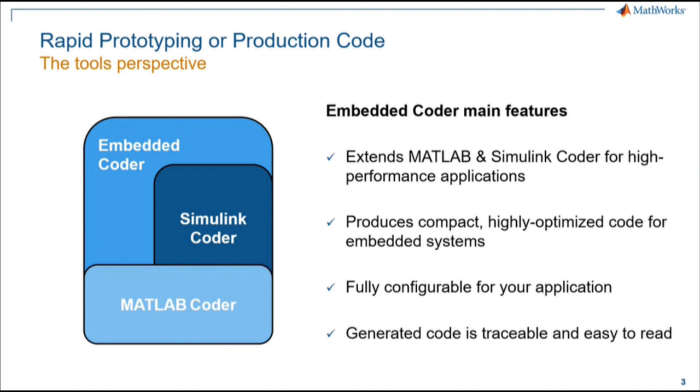But if you really have an embedded system where memory allocation is a concern because of your processor, and you're not running on a Windows environment, or you need your code to follow standards like MISRA, then Embedded Coder is your solution or your choice. Embedded Coder is based on Simulink Coder and MATLAB Coder. So that's it for the licenses. AUTOSAR Coder is based on Embedded Coder, so you will need one and another for running AUTOSAR with Simulink. Nothing too complicated here.

AUTOSAR has been running for many years, as some of you already know. It's an open and standardized architecture used in automotive. Here are just a few success stories of some of our customers using our tools within an AUTOSAR environment to develop applications.

Here is Fiat Chrysler developing a model-based design application using AUTOSAR to author and develop their model. We have BMW, who also did software development using model-based software with AUTOSAR. I'm not going through each one by one. Those are other examples, and at the end of the presentation we can provide the slides. Those are hyperlinks, and if you're interested you can read the various articles to see how they implemented the tools for the application.

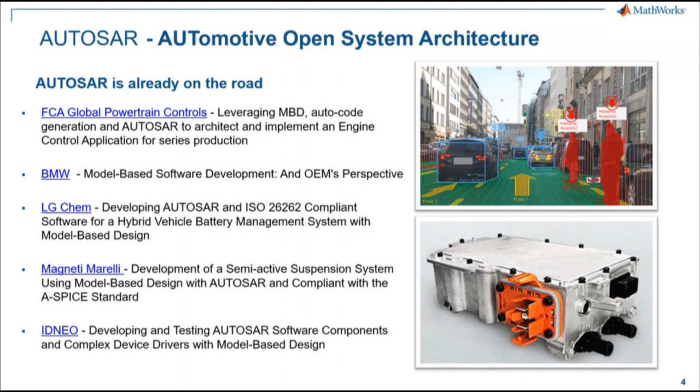So now we're going to start diving a bit more into the subject. AUTOSAR is a standard used in automotive, which stands for Automotive Open System Architecture. So we understand that is something we are going to use at the architecture level. I've seen in the chat that quite a few of you used terms like SWE.3, SWE.4, and so on.

That's an ASPICE term, so we will be, of course, around the SWE.2 architecture level. Just a bit of history: AUTOSAR was founded in 2003 by some core companies, mainly in Germany. I think PSA, Peugeot, Citroën were on top of it, not sure about Ford, but some companies around the world, plus a big core of German manufacturers. It was introduced to provide a standard for applications to talk to each other, something standardized as systems started to become more and more complex with more controllers within a vehicle.

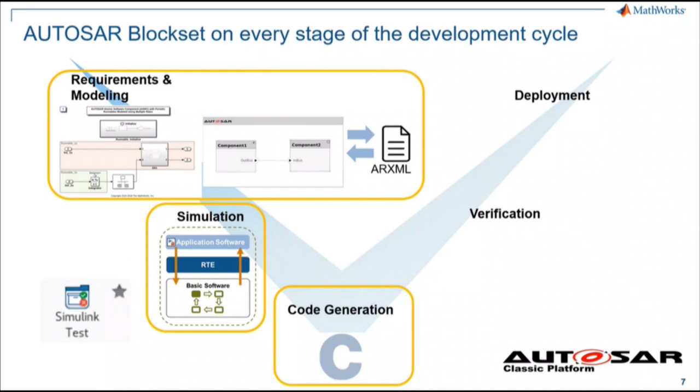We're talking about an XML file which you can import and export within your models. As all model-based design users are aware, you can simulate your model very early, running some tests even as a developer to make sure whatever you're developing is behaving as expected before formal testing. You can generate code from your model, and then run the official testing phase. We've got several tools for that: SIL/PIL Manager, Simulink Test.

And then, as mentioned, you can import an XML, start with your whole development, generate code, test, and then export an XML again, which includes some of the changes you may have brought during your development, and integrate that in another tool at a higher level into your development process.

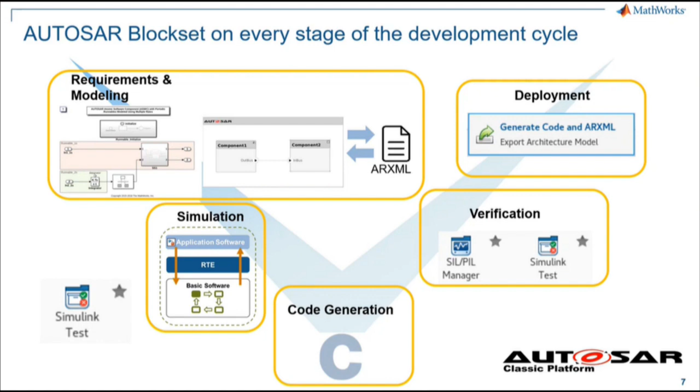So we are now going to just briefly talk about the adaptive support in Simulink, just to show you that we are supporting both standards.

So, as I mentioned, why are we having a new platform? We can see in this image, for instance, if we are developing an application for autonomous driving, you need to be completely aware of your whole environment - these are extremely safety critical. You'll have cameras, sensors, radar to map your whole environment, and all of that needs to go through your whole architecture to be processed quickly, in order to react timely and ensure complete safety of the user.

The vehicle will also be completely connected with its environment. Again, we're talking about a huge amount of data, and being connected to the outside world, which is not possible with Classic. It is something which is in the car with a standard bus and is not aware of what's happening around it, nor has any interest in being connected to what's happening around it.

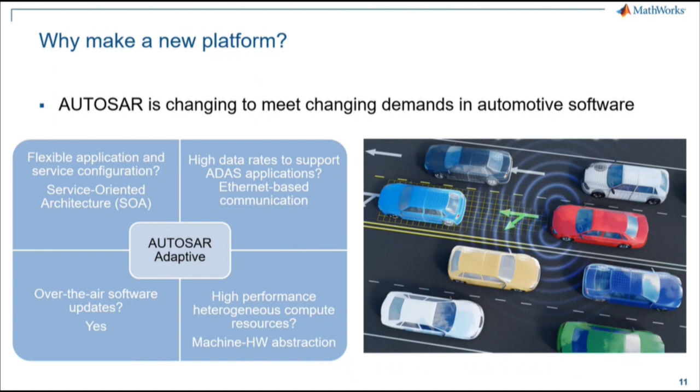Service-oriented architecture, adaptive AUTOSAR is C++ based, which means that when you have a classic AUTOSAR platform, you do have a software, you have your layer of architecture, which is talking to another application. Think about, and that will be one ECU talking to another ECU. In adaptive software, it's service-based.

Think about some independent little software which are talking to each other, sometimes within the same ECU, providing or requiring services, or sometimes doing both within the same ECU or some other ECU, each one fairly independent. Maybe a clumsy analogy would be the applications in your phone, which can sometimes retrieve data from each other. If you're into sport, you may use Strava, and then you have your mobile phone health application, which is retrieving data from there, and vice versa, within your own environment, which is your mobile phone, which is also talking to this outside world, regardless of what's happening with your application.

So we have some of the similar image we had seen already, just as a very quick summary about the difference between computing power. This is the instruction, the data instruction process per second, the amount of data which needs to be transferred.

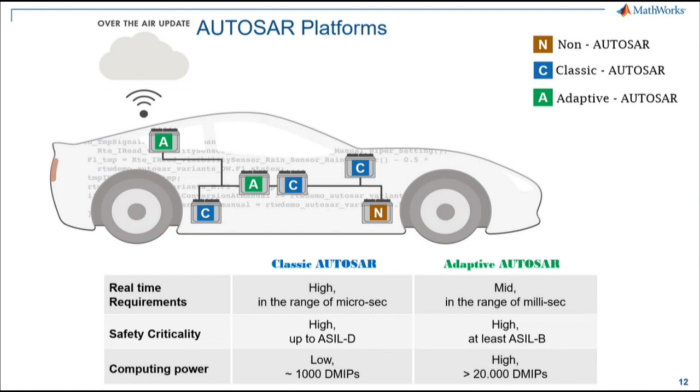We're talking about safety criticality. In classic AUTOSAR, you may use AUTOSAR, but it doesn't mean that everything is ASIL or has to be ASIL D. In adaptive AUTOSAR, it will be at least ASIL B rated. As I say, most of those applications are safety critical. And when you start replacing the user and having to understand the whole environment, you cannot fail. And of course, any failure in that can be quite dramatic.

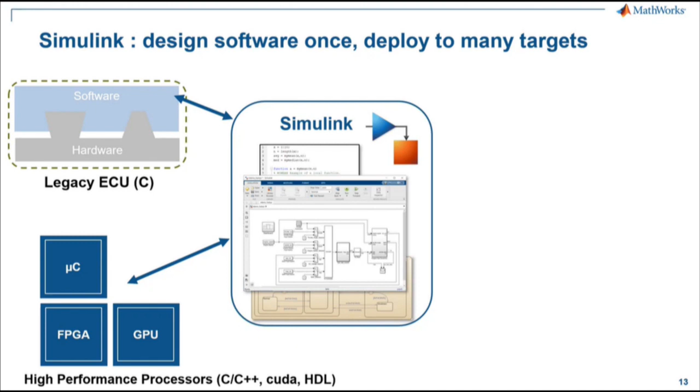And for that, you do have the possibility to use MathWorks tools, Simulink, to develop your whole application, regardless of your ECU. Different coders allow you to generate code in C, C++, HDL code according to your application. The possibility to develop application following AUTOSAR Classic standard or AUTOSAR adaptive, or to follow the adaptive standard.

So for AUTOSAR adaptive, I will just stop here. It's just really because otherwise we will not have enough time. It's just to show you that we are supporting the adaptive standard as well as classic. And something to mention, MathWorks is a key player, an active player in the adaptive standard, which means that we are also actively taking part in the redaction or the writing of those standards, which of course allows us also to integrate that into our tool.

So now we're going to go a little bit deeper into the subject, and now we're going to focus solely on classic AUTOSAR. Checking the time, we have an hour left, so eventually plenty of time.

So MathWorks' approach to mapping Simulink to AUTOSAR. So in here you have an XML file which will be defining your architecture, a very typical file. The way your component will look like into your authoring tool, whether you're using System Composer, SystemDesk from dSPACE, DaVinci from Vector, and the Simulink model or the function model, which eventually would be a representation of what is described in the AUTOSAR, and one to each other can be completely mapped.

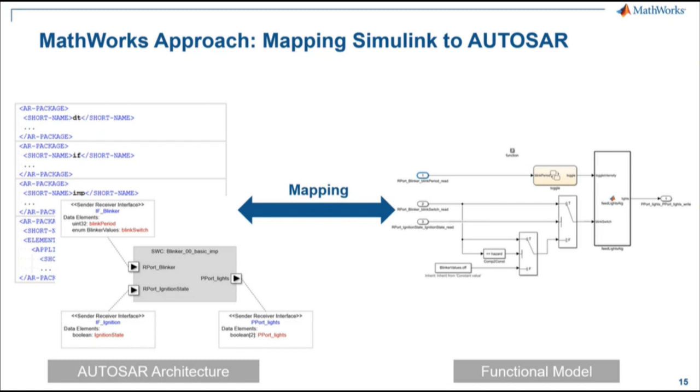So this textual representation in the XML, or what you have represented in your authoring tool, can be completely mapped into Simulink, and of course developed further, modified, improved, or corrected. So in here we would have, for instance, a software component which can be mapped directly to a Simulink model. So the AUTOSAR architecture will mention about 3 runnables with 3 clocks, which we can have an exact representation in Simulink. Within each runnable, so in here will be an AUTOSAR word, and within each runnable, so you have your mapping, you can then inside your runnable include your whole Simulink algorithm.

So some of you are unit developers or testers. So within your runnable, then you can bring all the application or the model you actually developed at unit level.

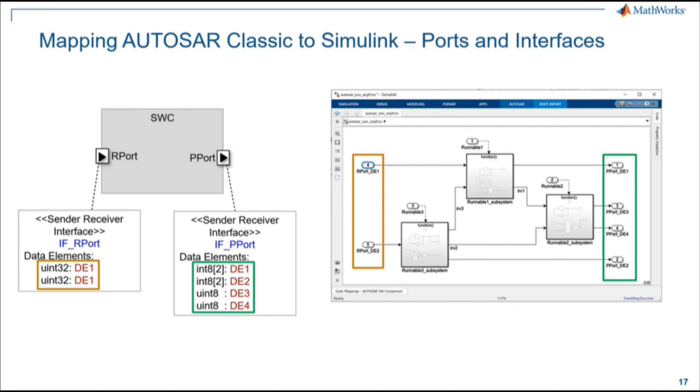Similarly about interfaces and how to map one to another, each port of the Simulink model, the input and the output, can be completely linked to what is described in AUTOSAR. Here we have a port which has 2 elements, so it could be a bus as well, and same thing with the output, which can be completely linked with one and another.

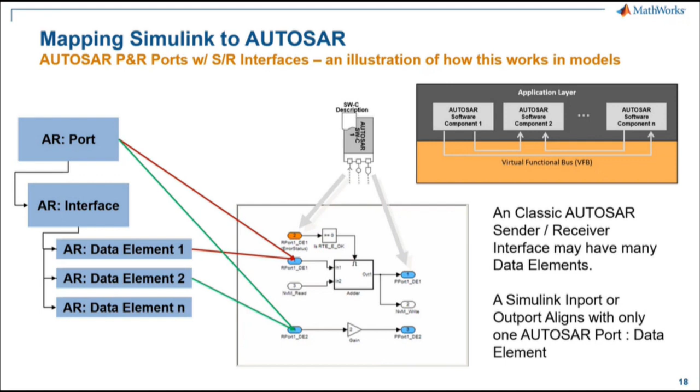Simulink gives you an exact representation of what is described into your XML or in your authoring tool. So talking about all the various possibilities which can be used to model your software and map your interface to Simulink, everything you have or may have used within AUTOSAR, the way you are defining data, array, vector, can be done in Simulink and mapped with AUTOSAR and vice versa. So you have all the modeling capability offered by Simulink within the AUTOSAR world. Whatever complex interface is described or defined in AUTOSAR can be completely imported in Simulink or developed in Simulink and exported to AUTOSAR level.

And we were to finish on the mapping subject. If you have used within Simulink a new development data dictionary, similarly you have within an AUTOSAR model in Simulink an AUTOSAR data dictionary, from which you can define all your interface, your runnable, whether you are your CompuMethod, the configuration of your AUTOSAR environment within the data dictionary. And all the information will then be completely present into the dictionary and can be linked within the model, but everything is centralized into one location.

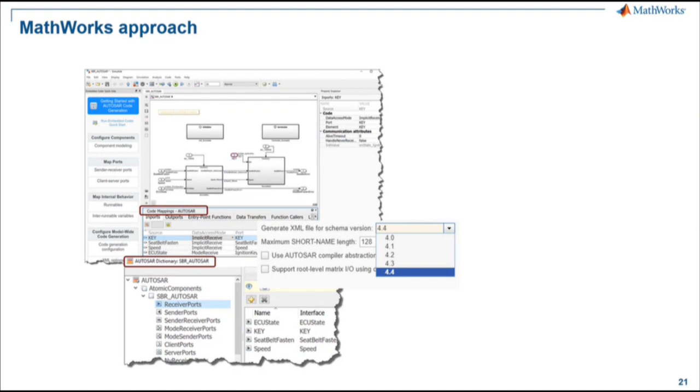This information provided in the AUTOSAR dictionary can be retrieved in the code mapping. If you are aware with the code mapping, that will allow you to set the information from the model code related to this interface. And you can of course choose which AUTOSAR standard you want to use for your code. All of those are inscribed within each other as completely integrated, kind of a closed loop system, if I want to phrase it like that. Once you have applied all those settings, you can then generate or export your code and your XML file.

So let's summarize a little bit what we have talked about. Port - everything which is present in the standard, so sender receiver, client server, port, non-volatile interface - can be modeled in Simulink.

Behavior - we have seen an example when it was function caller, so function call based, rate based. Simulink function can be used within AUTOSAR, and we give you the possibility to use those to model your application. Internal data can be modeled in Simulink - all those information which are defined in AUTOSAR standard. Possibility to use variant according to some platform you may have, so you can define different types of architecture or model according to some control platform. And all of those, as I said, can be modeled in Simulink, from which you can get your code and your XML file.

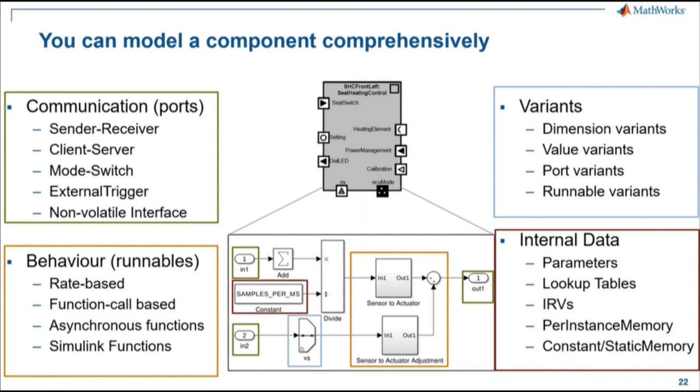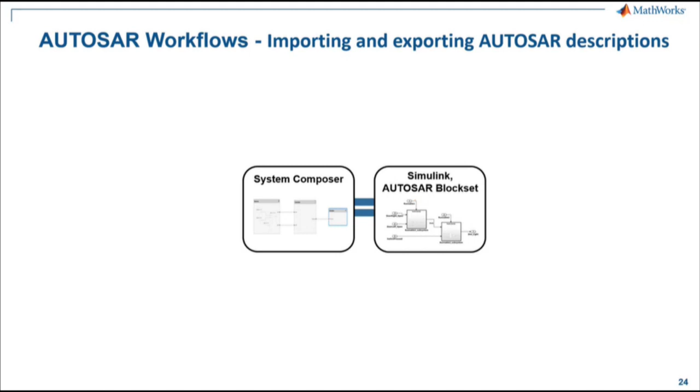So design workflow - talking a little less about the mapping, but just understanding what are the different directions which are supported with our tools. So in here you have an architecture which has been modeled, whether it's in Simulink or in System Composer. What can you do from it?

You can then generate your code from your C file, and you can export an XML. So here you are developing directly your model in Simulink - this is your starting point, if you want. And then you export your generating code, and you get an XML which can be imported at a higher level into your architecture, for instance. And that, of course, is called bottom-up, because the starting point is your model. You're not starting by the architecture level or the authoring tool or the XML.

Now let's assume another company is doing the architecture, or another department, and you have an architecture department which is just providing you all the architecture information. So the authoring tool or the architecture tool will export the XML, which you can then import into Simulink or System Composer. And whatever's described here, you can inherit within your Simulink environment. And as you can guess, that's called top-down, because the starting point is the architecture, and we are going down to the level. So talking about SPICE a bit earlier, we are SWE.2, and we're going to SWE.3.

Let's say we're starting with the authoring tool, we exported in XML, and then we start making changes to your architecture, to your model, modifying the interface, adding a runnable, and now we start having a difference between one and another.

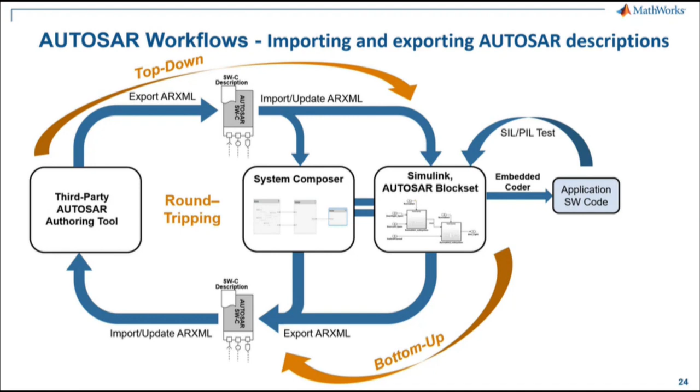Then you can import the XML to Simulink, and then export the XML from Simulink, and that is called round tripping. Once you have done all that, generated your code, exported your XML, everything is closed. You can also run or start the testing phase, whether you want to do a SIL test or a PIL test - software in the loop and processor in the loop, for those not too familiar with the testing jargon.

Now we're going to start doing a little demonstration. Let me just leave the presentation and go to MATLAB.

Let's assume now you are quite new to this, you never used AUTOSAR before. You just have a project which is required to follow the AUTOSAR standard, but you have nevertheless loads of models already developed in Simulink, but not in AUTOSAR - which means you have all those legacy models.

So ideally speaking, what you want is to convert those into AUTOSAR. Here we're having a very small model.

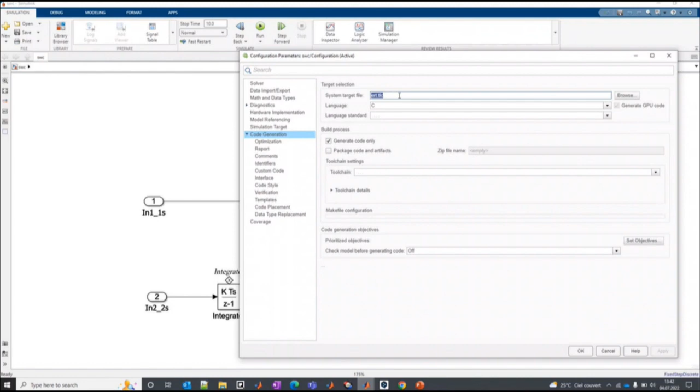And here, if I'm opening the configuration settings - it's Control E for those who like the shortcut - it's embedded code, so the model is set to use Embedded Coder. If I am opening the application, for instance Embedded Coder, then I have the regular code mapping, for those who are familiar with it.

Let me just pin that so the window doesn't disappear. Then you can see it's the same thing as normal. If I'm going to the storage class, they are the standard storage classes you can find in Embedded Coder. But nevertheless, I want this model to be AUTOSAR. So how do I do that?

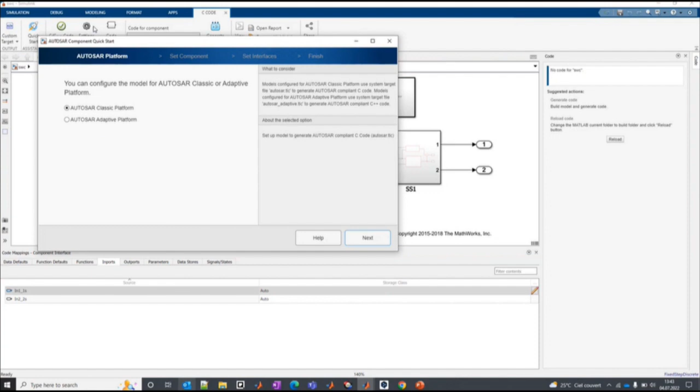If you have a Simulink model which comes out set to a standard coder, and you're opening the AUTOSAR application, you will directly be directed to this AUTOSAR component quick start, which will allow you to convert this model into AUTOSAR.

So we're going to use AUTOSAR Classic for this demonstration. The name of your component, whether you want to change the component type, component package, or whatever - we're going to use the default standard. Press next again.

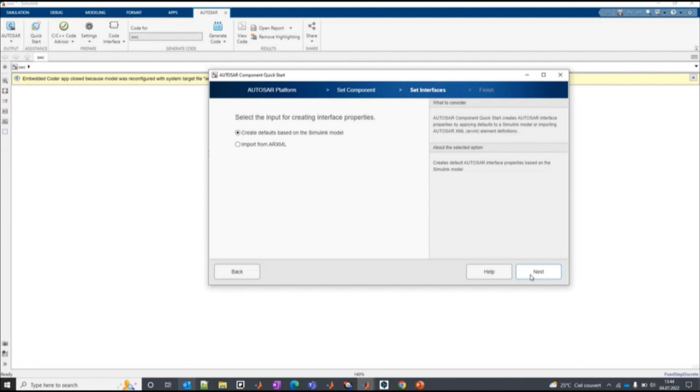Maybe you actually have an XML, and this is what you actually want to do - you don't want to do anything with this model, but you have an XML to import, or you want to create a default setting based on this particular Simulink model. And I am selecting finish, I'm waiting a little bit.

Just to mention, when someone's sharing the screen with Teams or so, it's always a little bit slower. So I'm sorry for the waiting, but it's not a big model - we shouldn't wait too long.

So what do we have now? Not something which seems different. However, we have now the code mapping is different. We have some import - the data, we're not talking about storage class now, we're talking about data access mode, whether it's implicit receive, explicit, and so on. We can see that now we are at AUTOSAR level.

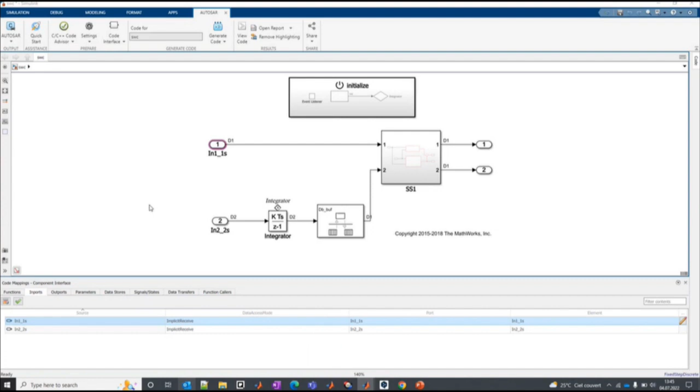And if I'm going to the configuration parameters of my model, we are now in AUTOSAR. We have AUTOSAR options here, which version of AUTOSAR you want to use, and so on - plus, of course, identical or similar code optimization settings which are available with Embedded Coder.

And here on the left-hand side, in the corner, in the code mapping, I can now open my AUTOSAR dictionary - sorry, data dictionary. In which, if I am... let's do it like that.

Now I have the various interfaces here which can be created, the ports of this particular runnable. So here's my import, my output, same thing for the sender port.

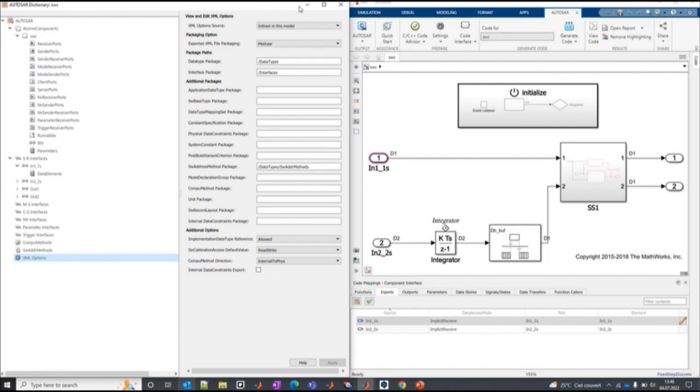All the configuration settings which I was mentioning are now available, and you're ready to start working with this model in AUTOSAR.

And if I was going to generate code from it, Control B, or I can generate code from here, but once again, I like shortcuts. It's working, so it shouldn't be too long.

A little bit of patience. We can open this diagnostic window and see what's happening. So starting building, it will take a bit of time, so I'm sorry for that.

Kind of a funny story - if you guys know Jeopardy, I have the music often on my mind when I'm generating code for any reason.

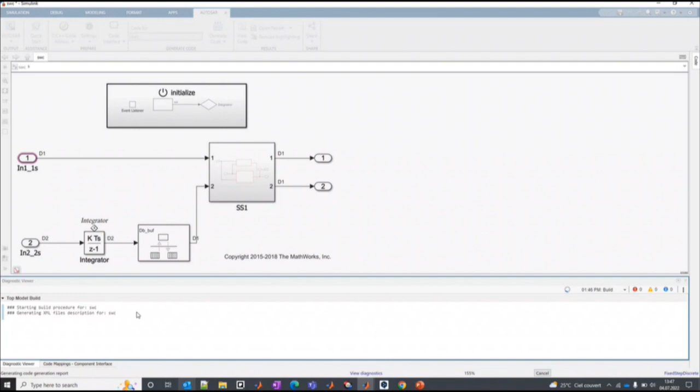So now we're generating the XML file description, technically the XML file. It shouldn't be too long, which means then we could generate standard code before we are now at the AUTOSAR level.

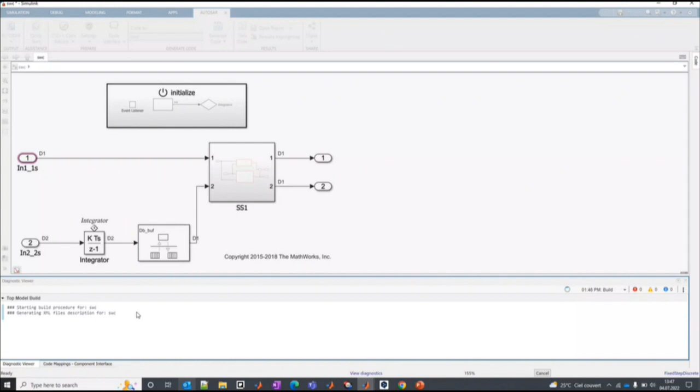And we are going to generate AUTOSAR compliant code as well, so let me close that. So here we have our code.

And we can see the code, starting with the Rte, so runnable, port or interface with Rte.

So now we have generated a complete AUTOSAR compliant code, and you can see the list of files which are generated. We have your Rte type defined here, all the XML of your model here. So with the component, the different ports, all your interfaces are present in an XML, which can then be imported within an authoring tool, as we already mentioned.

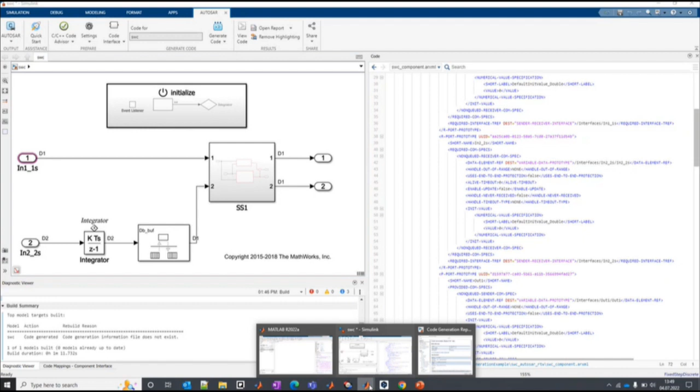So let me just stop that for this demonstration. We have a couple more later. Let me just go back to the presentation.

And sorry, so here, as we mentioned earlier with a different process, we've done a bottom-up approach. So we have a model, and then we're generating the XML and the code - a function call modeling style.

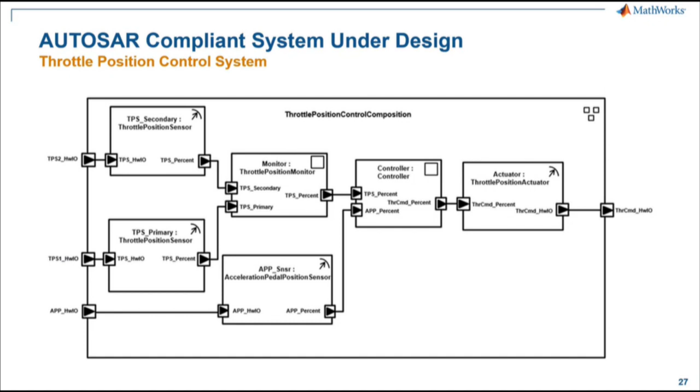So let's assume now we have this AUTOSAR representation, whether you developed it with System Composer or another tool you are using for your architecture. You would like to have this exact representation in Simulink.

So once again, we have that little guy, and what we want is to import. So from this authoring tool, we will have an XML available, and we'd like to import that into Simulink. How do we do that?

It's actually fairly straightforward - we just have these two lines of code. That's the name of the XML which will allow you to import it. So even if you have not used AUTOSAR and you have an XML available, maybe from another vendor or another company working on your architecture department, with this line of code you can import it and you will have this exact representation into Simulink. You can see the layout is similar, the interfaces are identical, and so on.

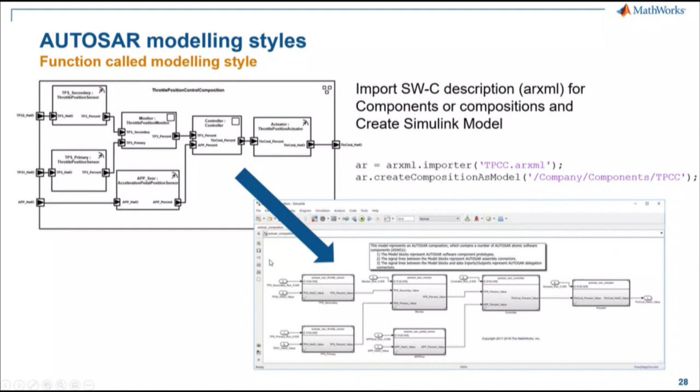Now let's assume the architecture department is giving you an XML file, and then a couple of weeks later they bring some modifications into the architecture. You would like to import this new XML, but that doesn't mean you're going to start from scratch and figure out what they changed. It's actually possible, again with the XML importer in Simulink, to update your architecture from a new XML.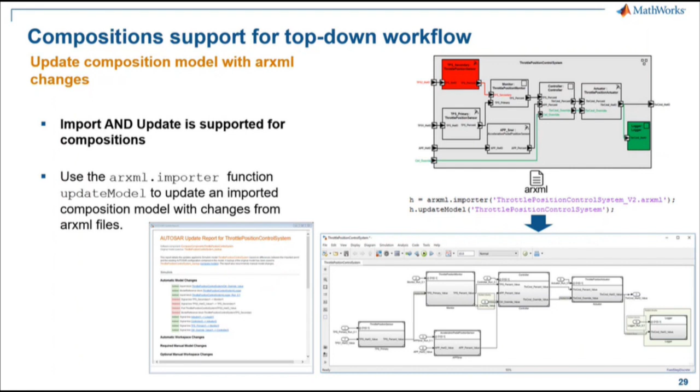Of course, you cannot model what has disappeared, but there is a report which is also generated, which will list all the parts which have been removed. That is an HTML file, it can be changed, it can be opened separately. Then you can see exactly where the changes are without needing to start from scratch - so much easier for model review.

Once again, we're going to go back to a demonstration. If you have any question, just let me know, you can ask. Let me just close the previous application—no, I don't want to save. I'm going to clean that and move to another example, and this one will be function call.

Hello, hello, this is Mustafa. Do you have an example for basic software side that also, I suppose, that you showed to the application side?

Yes, I have. So two things: I'm going to show you, so in a third demonstration, we're going to have basic software module in a demonstration. I have prepared a model which is a simulation of a diagnostic event manager, finding a fault and reacting to that. If I don't have time to show this example, I have nevertheless at the end of the presentation a link specifically with that example where you can simulate an application of basic software and observe how the model is reacting to it.

Thank you. You're welcome. So I have opened a project, and we'll just open this AUTOSAR composition model.

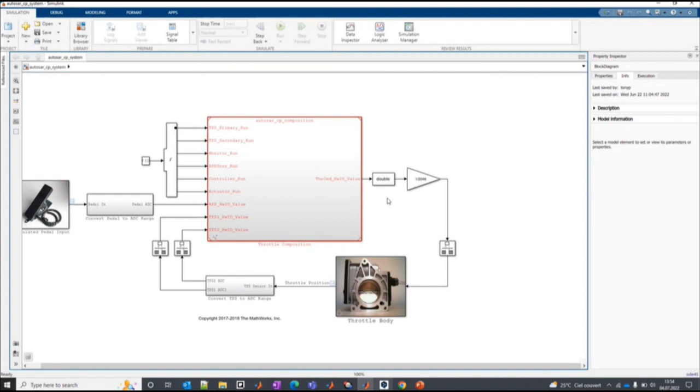As I said, everything takes a bit more time when you are sharing. So nothing too fancy — in here we have some input in order, some feedback in order to validate, control, prove, and check our composition in here.

So I will just start by running a simulation first, and then we're going to dive into it and I'll show you a little bit how it looks. In here we're not in AUTOSAR, it's just a regular embedded coder and stuff like that — it's just for simulation purposes.

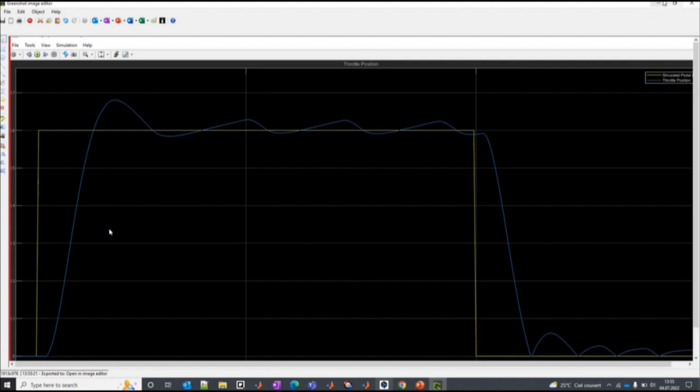The AUTOSAR part is this model reference, which we are going to go into in a second. I have run the simulation and I have that — it's not that important, let me take a screenshot of that because I would like to show you something later. So we save this for later. I can run a simulation and then assess if my model is behaving as expected.

And now I'm going to this composition model. The layout is very similar to what we showed a little bit earlier. Here I have function call model reference, each of them being a runnable, and inside I have my algorithm — nothing too fancy, it's just a lookup table, and each of them will have its own algorithm.

So I'm opening my application, and once again, going back to the function interface, I have my little import, data access mode, and my data dictionary. Here, just to show a bit about the difference from what we saw in the previous example...

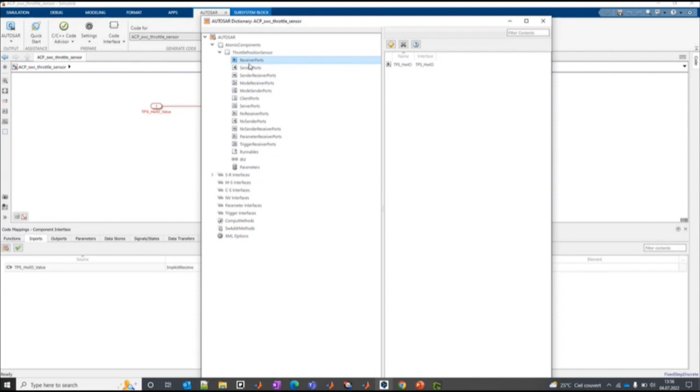We have this throttle position sensor, which is this component, and very similarly we have the interface, this percent, this hardware input interface. But in here we can see many more sender receiver interfaces, and that's all the interfaces present in the composition. Here it's specifically for that component — if I open another component, I'll have all that information here, but the mapping would be specifically presented or shown for that particular component.

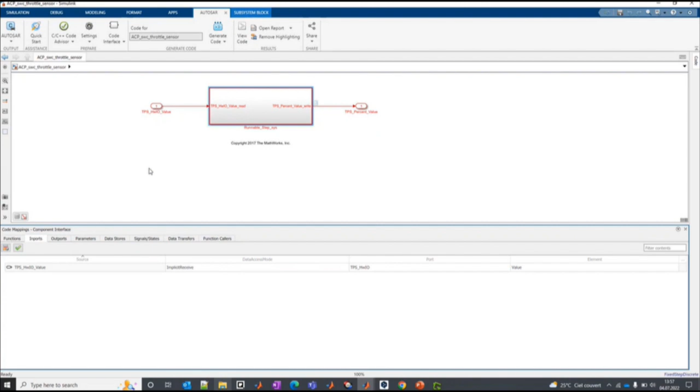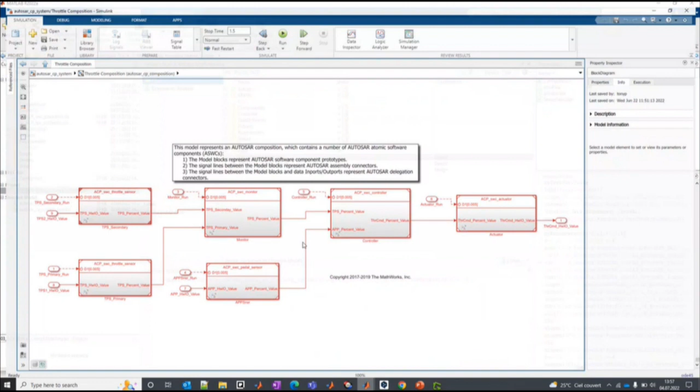So once again, we have something very similar: we have Simulink, we have the AUTOSAR data dictionary, our interface defined here, and so on. But now, let's say we don't have that, and the only thing we have is a blank model reference, and we're starting from scratch. So how do we do that? Let me just close all those, have something a bit clean.

So we mentioned importing an ARXML. I have my ARXML here — let's see if I'm opening the right one. Yeah, so a typical XML when I have everything defined, and that's it. I'm not going into detail, just showing you, okay, this is my XML. I mentioned earlier that with a couple of lines you can just import the XML, so I want to show you, I didn't lie — I only have these two lines: arxml.importer and createCompositionAsModel.

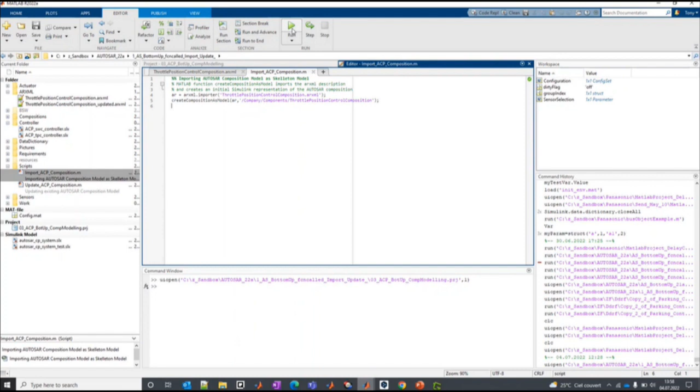The composition is this model where all the runnables are linked or connected with each other. So I'm just going to run this script, and we're going to wait a little bit for the import to be finished.

And now I have this composition. But what's the difference? I have the same runnable. So let me just open the runnable itself.

Similar, I am still in AUTOSAR. I have a component, I have my data dictionary, but if I go inside, I don't have any algorithm, because AUTOSAR at the end is an interface standard. So now I am ready to receive my algorithm.

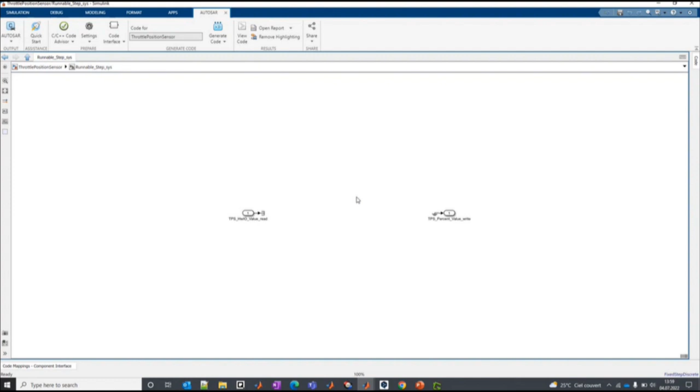As I mentioned a few times, some of you are unit developers, or you are at that level. This is where you're going to start. You get the XML from the architecture guys, you import it, and now you can drop all your algorithm within the AUTOSAR framework.

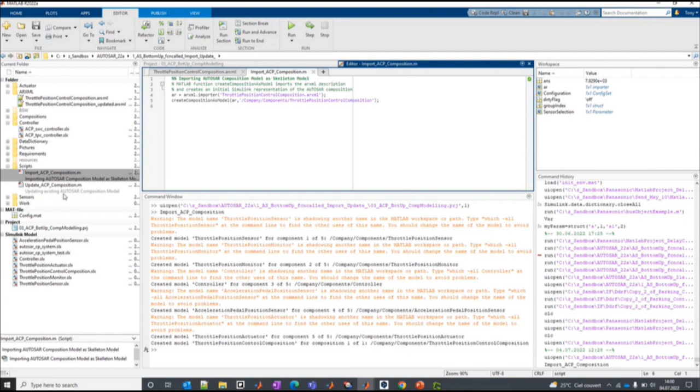Just to show you very quickly, for the demonstration, let me go back to my script. Here, if you want to update, it's also just a couple of lines. So the XML importer is identical. Here we want to create the composition model.

And then the function is a bit different. I want to update the model, which is of course the same name. And I will run that. Okay, it's 2 o'clock.

And now it's going to start opening. Now it's talking about 6 components. So it's updating component 1, component 2, and so on, then saving the model.

And I have a report, as I mentioned earlier, which is pointing to the changes into the model. And as shown in the slide, all my changes are now highlighted in green.

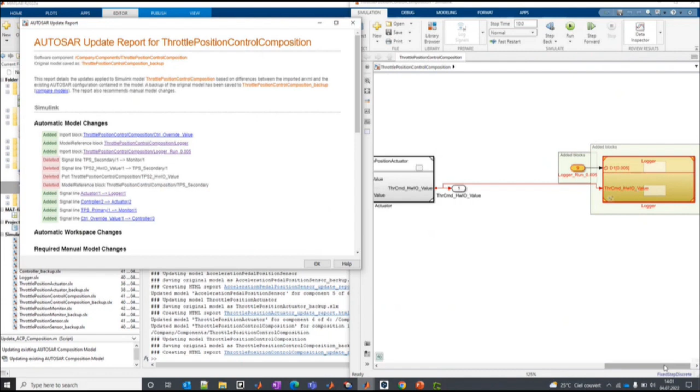From the report, let me just do that, I can select and navigate using the hyperlinks to the exact location of the changes in my architecture. Of course the deleted items are not shown, but they are listed in the report. And it's telling me that this component, TPS secondary, which was here, has now been deleted, as well as all its interfaces.

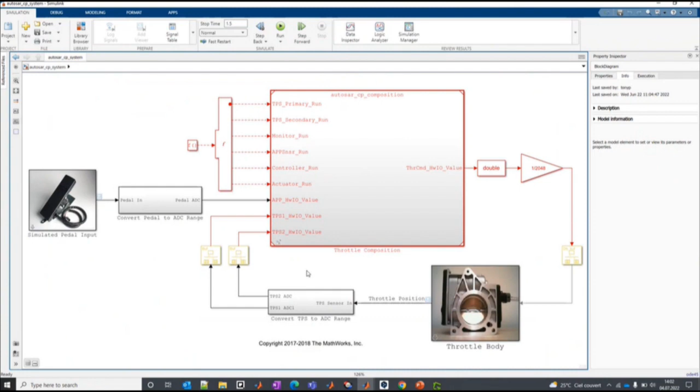And that's it for the demonstration. We can see how quickly we can import or update our XML and start dropping the algorithm or the unit within your composition.

So let me go back to the presentation itself. And oh yeah, something to mention, one of the links I put at the end of the presentation is the release note, because I don't know what version you are using, or what version you're planning to use in the future, but you will see the list of new features or improvements included for every single release.

It could be a presentation on its own to detail each release, but something interesting some customers have asked for quite a bit of time is the possibility to generate an A2L file from an AUTOSAR model, and from 22A it is now possible.

So if any of you, some of you guys are software testers, and I'm not sure if you're doing calibration work as well in the system, you can now export an A2L file. This is where it is located. If you're using Embedded Coder and generating an A2L file, it's very similar - you have the share button on the right hand side of your tab on top.

And that's it, so it's shown as that. Oh, and that's the setting of your calibration. You have different versions for your A2L, whether you want to also generate a CDF file, address replacement, all that is now available.

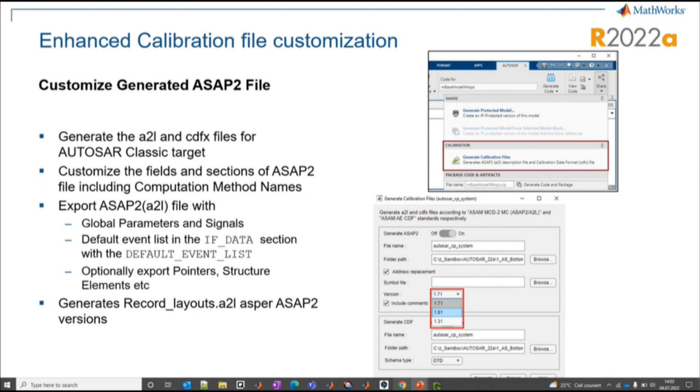Good, System Composer, we mentioned it a couple of times. And if you guys are using an authoring tool, you can now use MathWorks tools to do something similar. So where are we at this level? We are right here.

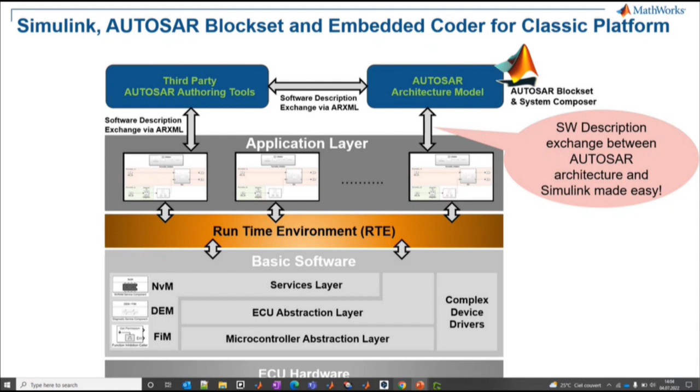So you can now model your entire architecture. You can export XML and import that to Simulink, or as I was going to show you, you can also include your Simulink model within your authoring tool and have everything completely integrated with each other. Not spending too much time on that, it's just a navigation panel for System Composer if you're not familiar with it.

At the end of the presentation, one of the links I've placed is a video, about 10 minutes long, and it shows you how easy it is to actually create an architecture model from scratch with System Composer. It's a bit accelerated, but you'll see the tool is fairly intuitive.

This is how it looks. You can create a composition very similar to what we've seen, but not in Simulink—something developed for system architecture. I don't see the chat now, so I don't know if we have architects today, but this tool is for you. You can import XML, you can define components.

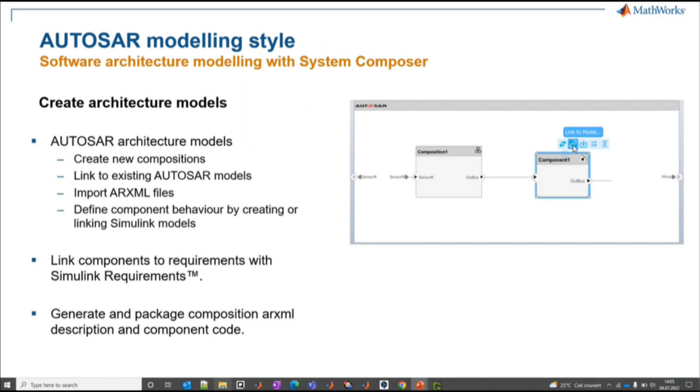Here is really an architecture tool. You're not putting in any algorithm or functionality, you are doing architecture. It's really interface definition. Then you can export—for System Composer you don't generate an XML, they use export—and you can do all that.

Basic software—we're going to talk about that a bit more again, but this is more or less how it looks for this. You can have a basic software module. The capability to simulate the basic software into your Simulink model before the integration was something quite requested or demanded by the customer.

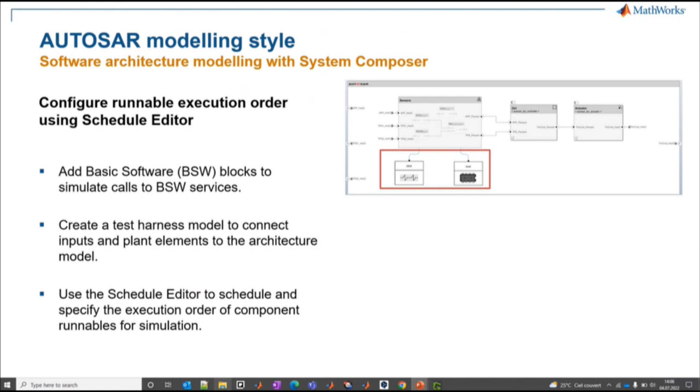You can create this harness model, very similar to what I've shown with Simulink. So you can validate your composition developed in System Composer with input test vectors and visualize the outcome. You can also play with the scheduling of your composition—something optimized for architecture.

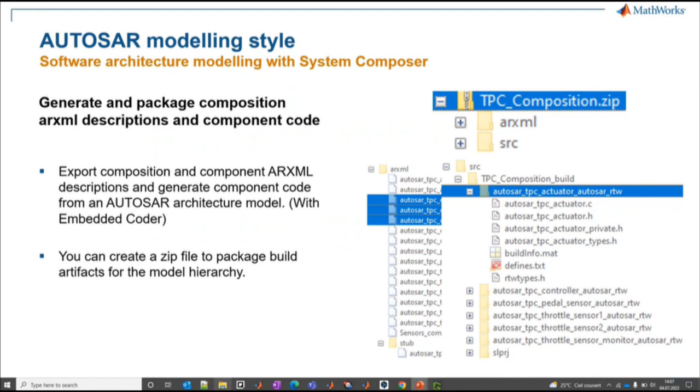And what do you get from it? Exporting a folder which will contain your ARXML files with each of your components, interfaces, data types, and so on, as well as all the C files or code generated from that composition. Now for the demonstration, we need to rush a bit.

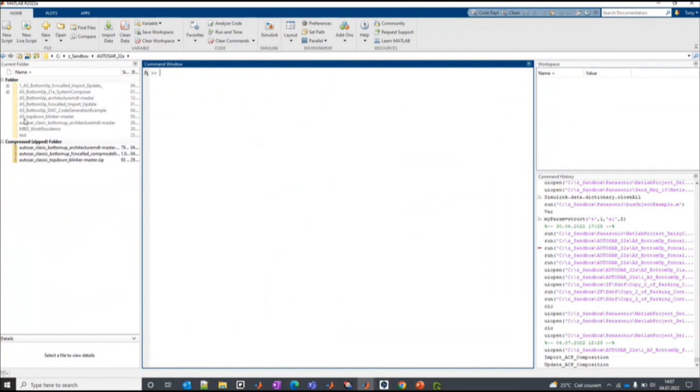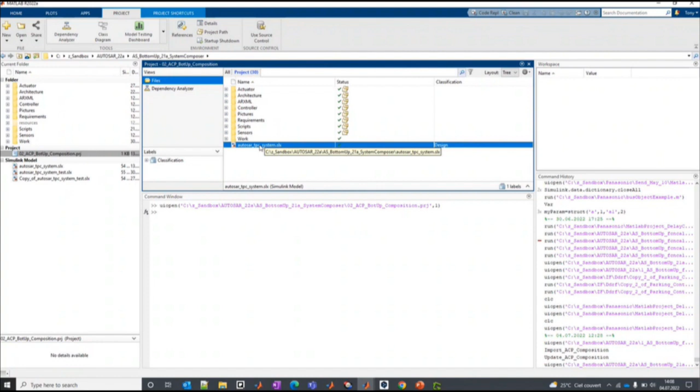AUTOSAR, where is the guy? System Composer. Very similar, I'll open again the Simulink project. I'm not sure if you guys are using Simulink project—you can link all the relevant documents into one framework, script, requirement, and so on.

You might recognize this test harness—we've seen exactly the same—and I wanted to run a simulation again. If you remember, I made a screenshot during the previous simulation, and I'd like to show you something.

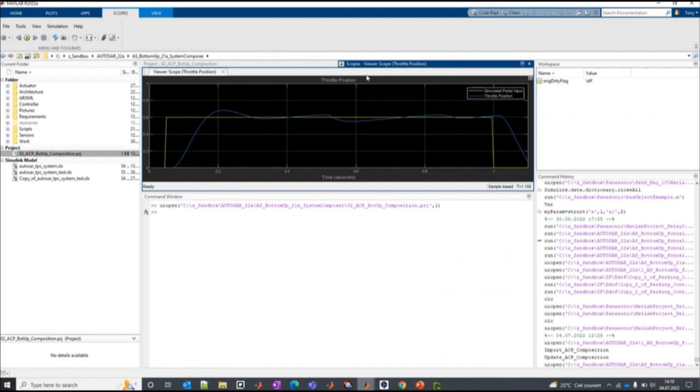So, if I am opening my scope—come on, if you want to open it. Sorry, I'm trying to open the scope. If you'll be kind enough to open, that would be lovely. Unless I have—oh, okay, it was undocked. So that's my scope.

If I go back to the screenshot from earlier, you can see the scale is a bit different—actually, the scale is exactly the same. Let me stretch it a bit. You have exactly the same behavior.

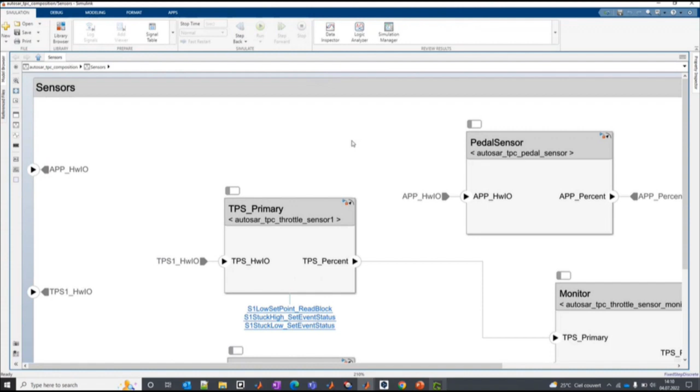What I want to show is that regardless of which tool you are using—we're going in now, I'm opening the model—whether System Composer or Simulink, the behavior is exactly the same. I just wanted to show you it doesn't matter which tools you use, you'll have similar, identical behavior.

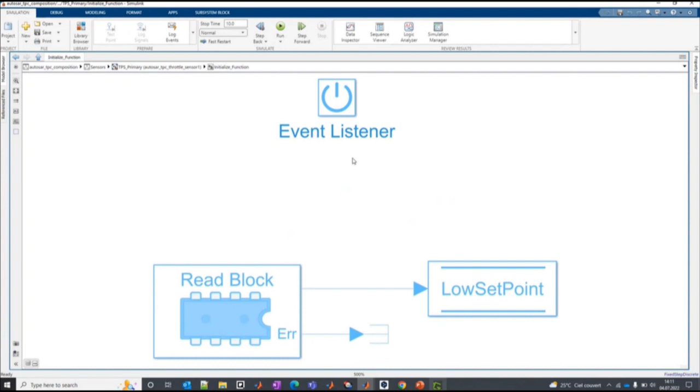For the question about basic software: here, the way it's set up, is my lookup table I showed earlier, but now I have some basic software module recording or detecting any failure or error into my software, according to the behavior of the software linked to the basic software. There's a lot of 'software' in my sentence, I'm sorry.

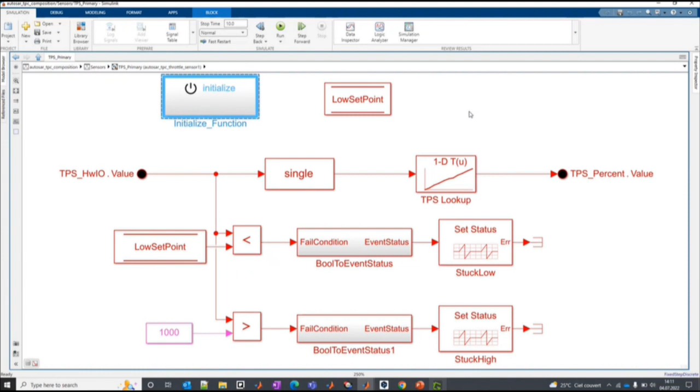So here I have some NVM service caller, with some set points set during initialization. Those are read here. I'm setting some status according to some requirement. Those statuses will all be read here, and according to some condition of those statuses, I'm going to react accordingly.

So for instance, if I am detecting an error in one of those, I will switch from the primary sensor to the secondary sensor because I have detected a failure. And if I have two errors detected, which means my two sensors are faulty, then I will react completely differently.

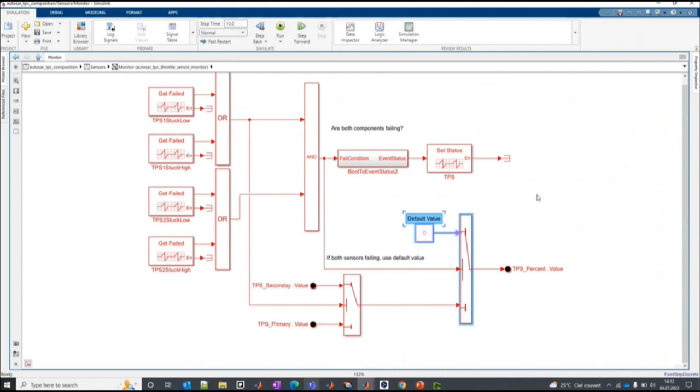So this is the status of my sensor, not TPS sensor 1 and 2, it's status of my sensor, and that will affect directly the whole output of my entire composition, which is at the end this guy. Did I answer the question about the basic software?

There was Mustafa, I think, if I remember the name. Thank you, Tony, no worries. So again, so this is all my... Yes, please, please, Tony, go ahead.

As I saw, the NVM part and also diagnostic event manager side, all that functionality is coming from Simulink side in the AUTOSAR block as a built-in function. It's part of AUTOSAR block set, and here we are in System Composer. But if you select the link I put at the end of the presentation, when you receive it you will see that the example is with Simulink, so those two can be brought together.

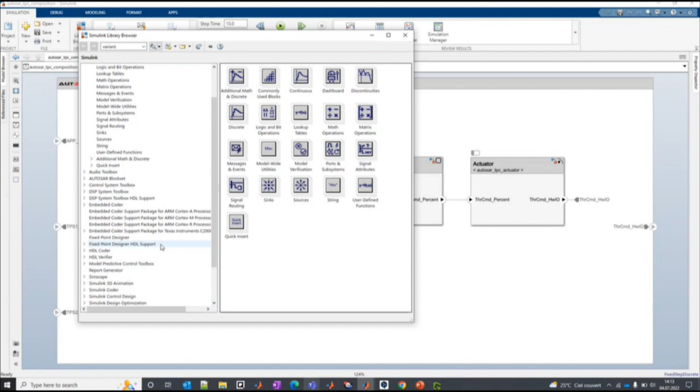Actually, we're going to open quickly the library browser, and you can see there is this AUTOSAR block set in there. If I'm looking for AUTOSAR block set, classic platform, I have the basic software here. So it is part of AUTOSAR block set, and you can use it whether you use System Composer for AUTOSAR or Simulink.

And the example I put at the end is how to simulate and how to use that, which is exactly what I've shown. I was thinking that all that basic software part is coming from AUTOSAR block set, but as far as I saw from your block set, for example, I couldn't see the CAN driver part of basic software and LIN etc. It doesn't mean everything in AUTOSAR standard is implemented currently - some of it, which is defined in AUTOSAR standard, we have implemented some part of it. I'm not telling you that everything which is in AUTOSAR standard is currently available.

It's a work in progress, if you want. So slowly, I'm expecting they will implement more capability, but I will not tell you at the moment everything is possible. Actually, I will show you, for instance, for AUTOSAR Adaptive, we have started implementing some capability, but not everything which is in AUTOSAR is available currently in Simulink.

Okay, thank you Tony, good. So we're running a little bit out of time, so I will stop the presentation here. I just want to show you something very quickly - I will not go into detail. I just want to say that again, if you're starting from scratch and you have a blank model, you can...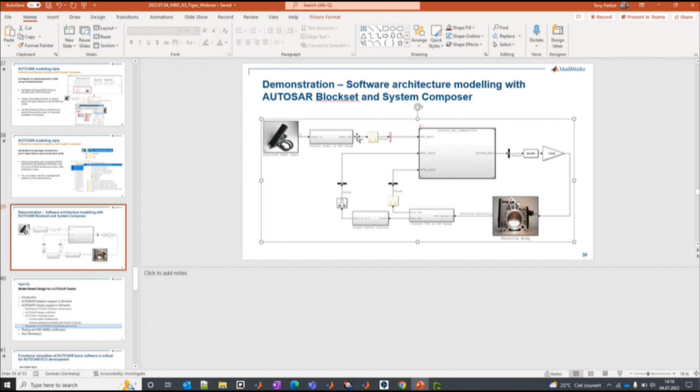In here, import from - so in the modeling tab you can select your ARXML, and then you will be importing your ARXML into System Composer, and you will have something identical to, and you will have these compositions similarly to what we've seen in Simulink. Because of time purposes, I will just skip that. But bear in mind that if you have a blank model, you can import directly the ARXML. It will take a bit of time, so I would like to skip this part if that's okay with you.

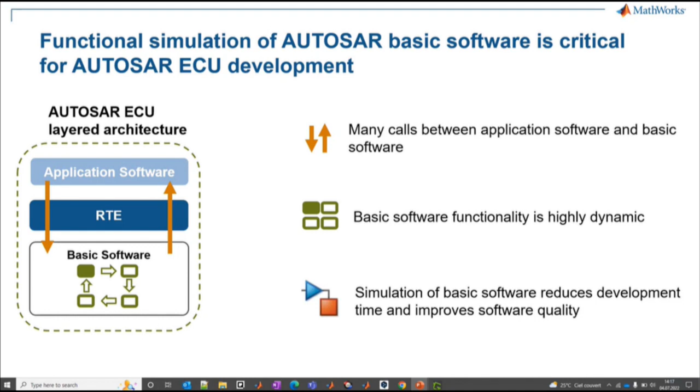So let's continue with the presentation. I might rush a little bit. So we're talking about basic software capability. As you can imagine, for those who are working with it, there are many calls between application software and basic software. Basic software is fairly dynamic. We're talking about the reaction and simulation of basic software, which will increase the confidence you have during development before finding any error during integration. You can also check that your software will react accordingly.

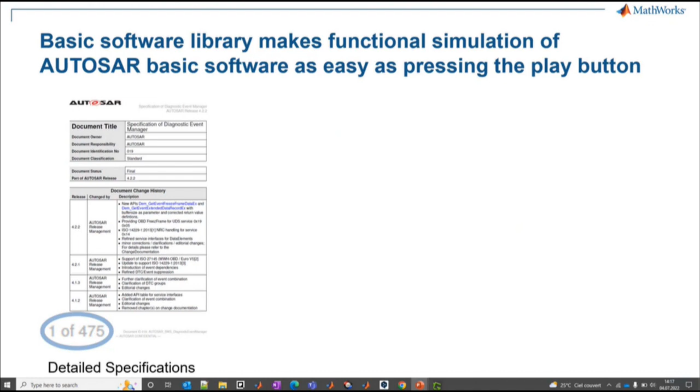We're talking about basic software library. Mustafa, to go back to your question - we have, for instance, this is for diagnostic event manager. The specification is 475 pages, which we included into what I have shown you earlier with some capability to be able to simulate those.

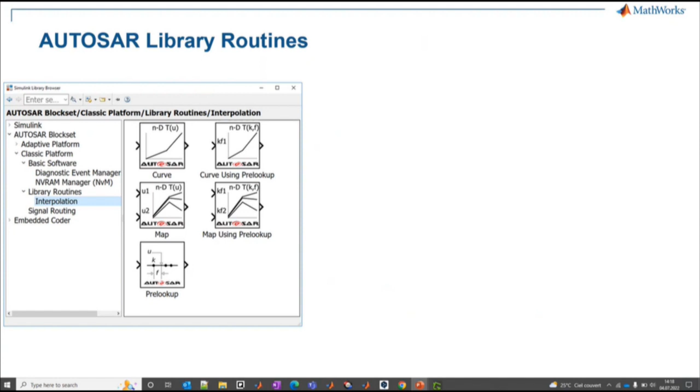Sorry. AUTOSAR library routines - some customers asked to be able to simulate and generate code from these AUTOSAR library routines. Those 5 blocks, for instance, this was an interpolation. If you go to what is in AUTOSAR, you will have many more. I would expect that in the future we will have more routines available in Simulink, but just to give you an idea, those 5 blocks are covering 127 routines defined in the AUTOSAR standard. So eventually it does make your life a little bit easier.

And just to show you an example, this is how your code will look like. And here there will be a very small video. It will be part of the presentation, so you can simulate that later as well, because I have a problem with my bar.

You have some detection about whether for the seatbelt according to some control, and here will be what is observed or recorded for the basic software. So we have something which is detected, speed stuck low. I'm going to click on that. The control is going to increase the speed. And now we can see that past a certain threshold, we have detected a failure in here. The fail status is now going from 0 to 1.

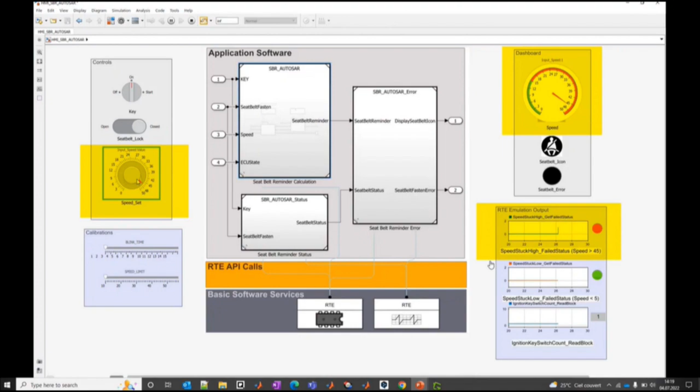So just to show you that you can set an entire simulation and have something nicely set for your visualization with a nice user interface. Testing - we have a few testers in here, so that is your part.

Sorry for the throat. So Polyspace, I don't know if you guys are familiar with Polyspace. We have mainly 2 main products, Polyspace Bug Finder and Polyspace Code Prover, which will allow you to run different checks from one tool to another on your generated code.

Polyspace Bug Finder is the tool which can be used quickly by developers. They're going to check the code - is it MISRA compliant? You're going to have some warnings, you can change your model. You can use that on a day-to-day basis, which ensures that whatever the developer is doing is going to be nice and clean and not going to be flagged later by the tester guy saying, I have too many warnings, we need to change the model. Because as you're all aware, everything which is found by the tester increases the development time quite drastically, because then you need to re-go through the V model and go through the loop again and again. So everything which is done earlier, it's time and money saved for the project. So fast, easy, precise - once again, this is the tool for the engineers, the integrator, to check the code.

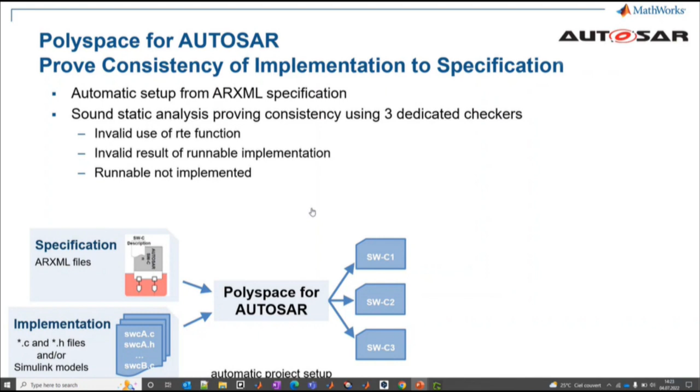Since some of you guys were pointing to their responsibility or their job, where they are standing in the V model in ASPICE.

So I suppose, or assume, you all have to work with ISO 26262. One part of the ISO is the necessity to qualify your tools for being compliant with the standard.

And there is a tool from MathWorks which allows you to use a test suite, some pre-ready checks, which will help you qualify your tool for regard to ISO 26262.

So what does it mean in principle? Why do you need to do that? Because you might think, oh yeah, the tool is compliant. But the tool needs to be qualified in your environment. So it's pretty much that - we're providing a tool, and you need to qualify it for whatever your application is.

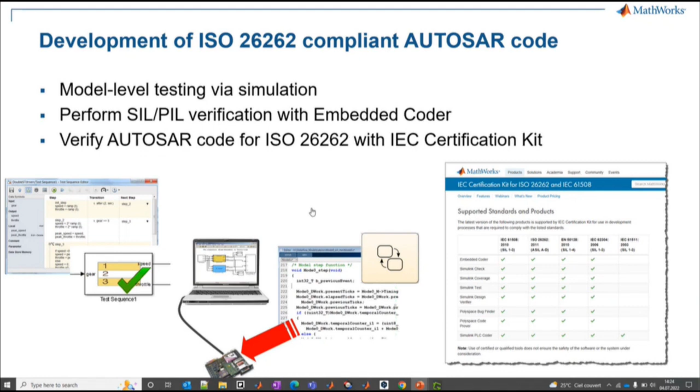And that is what is required by the ISO. And in here, according to the ISO and the workflow, you will see where all the MathWorks tools fit within a complete development process, and which tool can be used for supporting your process according to a full validation and verification workflow.

So we have Simulink Check in here, Simulink Design Verifier, which can be used here. Simulink Requirements, which you can use to link requirements to your code, to your model. The generated code will contain a link to this requirement to ensure full traceability and so on.

Then you can check Simulink Test for SIL, PIL, back-to-back test, MIL, SIL - if you want to do unit test. And Polyspace again for the code check that we mentioned earlier.

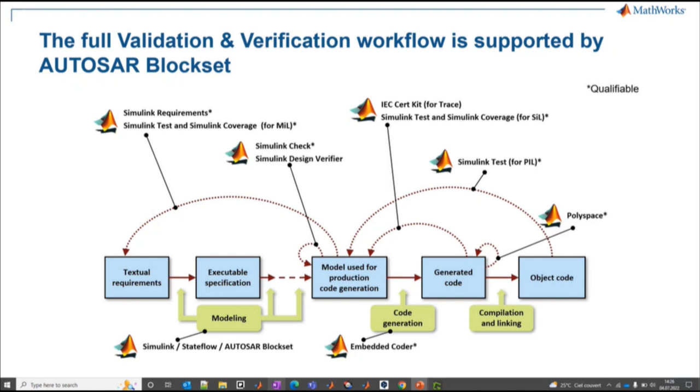So key takeaway - we're arriving at the end. We have okay a bit of time, just to summarize a little bit what we have talked about today.

So we mainly focused today on Classic, but as I mentioned, AUTOSAR Adaptive is fully supported. The process I mentioned with the bottom-up, top-down, round-tripping is identical with Adaptive. The way it's defined is a bit different in terms of the architecture of AUTOSAR Adaptive and Classic, but both of them are fully supported.

You can simulate your composition, you can simulate your algorithm, you can include basic software modules into your models. You can create your architecture in Simulink. You can author your architecture in System Composer.

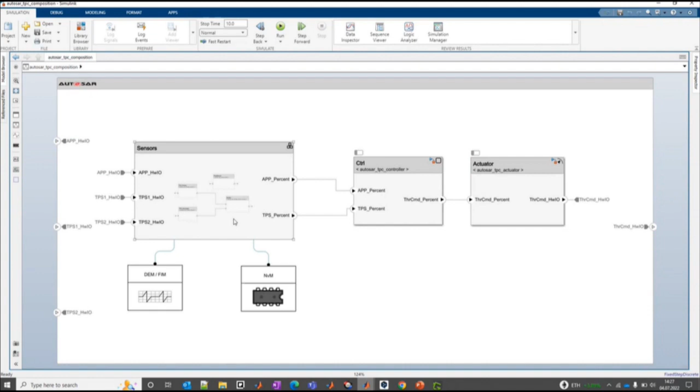And as we've seen, I might still have that open - here we have my composition model in System Composer, and when I go inside, it's a pure Simulink model. I am not in System Composer anymore. So getting back to my presentation.

We can generate C++ code for code generation. Something I haven't mentioned - oh, it's not obvious - you can use code replacement for your code according to the hardware you are using. Whether for your processor, there is a possibility to generate hardware-specific code and have optimized code for your application.

We're talking about, you can perform PIL, SIL, Simulink Test, SIL PIL manager if you guys are using it. We're providing some tools which will allow you to qualify your workflow, your tool chain, according to ISO 26262. You will have to do it, or you're already doing it, or you have done it, but it could be quite a tedious work to do by yourself. So here there is a tool which can help you with that.

And to finish, we mentioned Polyspace, which can check all your generated files - your code and your XMLs - against each other, against the AUTOSAR standard, against runtime errors, mentioning overflow, to increase the level of confidence of your application, and at the end have a better product.

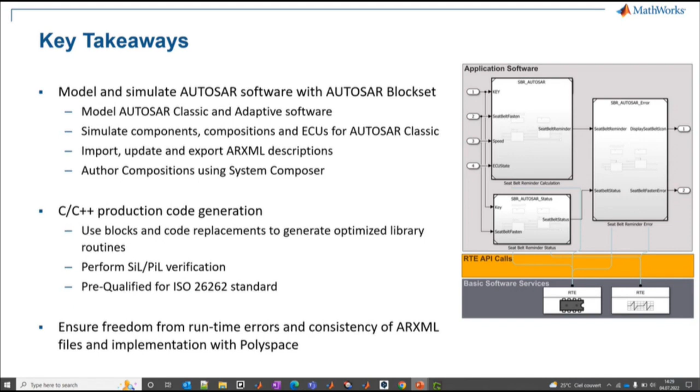I'm not sure how we're doing with time. It's almost done, but have you guys any questions?